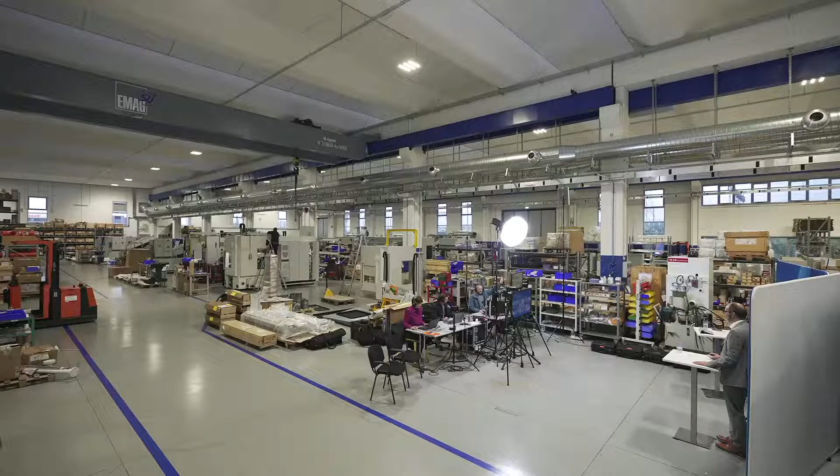This is the new plant of EMAG SU, the company formed by the former Samputensili and CLC companies that EMAG acquired in 2021. So we are now presenting you the companies and the new factory and plant.

The acquisition started last year, and one of the main ideas of the acquisition is for EMAG to be capable of proposing on the market a complete set of processes used in the gear business, in order to produce from a blank to a completely finished part, the complete gear teeth involute.

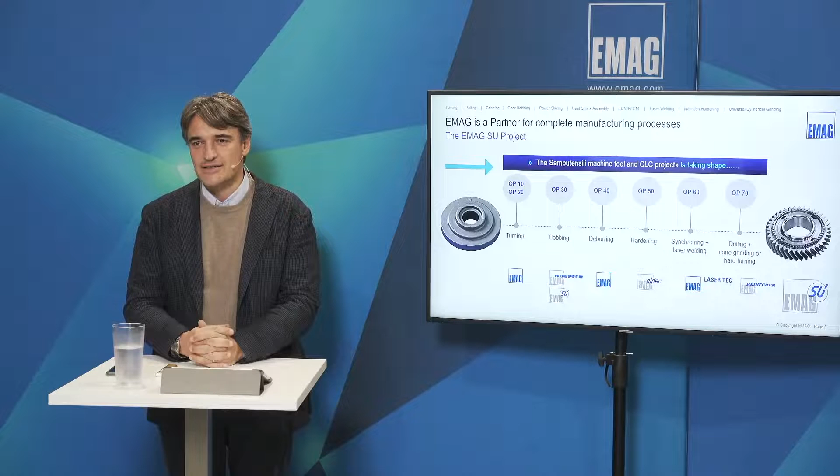So we see in this chart how the products of EMAG SU are entering. EMAG was already very competitive in the proposal of standard turning, hobbing with some EMAG Koepfer, deburring, hardening, and laser welding. Now with the products of EMAG SU, EMAG is capable of reaching one of its main targets and missions: to present a complete line for gear products, with the addition of some cutting machines, hobbing and shaping, and also with the addition of the Samputensili grinders at the end of the gear process.

So again, we are happy to welcome you here in the new plant. This is a new technology center. Here we are basically collecting the previous two companies, Samputensili and CLC, and we have been operating here since the beginning of May of this year.

We have already started delivering machines from the new plant, and we have inside all the activities related to the EMAG Technical Center for the gear business related to EMAG SU products. So we have design, engineering, assembly, pre-acceptance and final acceptance testing of the machines and testing of our products. We are happy to present our plant.

We want to go a bit more into detail on some proposals we have for electrical transmission, for the eDrive, for which we have developed some dedicated solutions that we want to present, together with a tour that we will make at the end of the video, to show you live some of our applications.

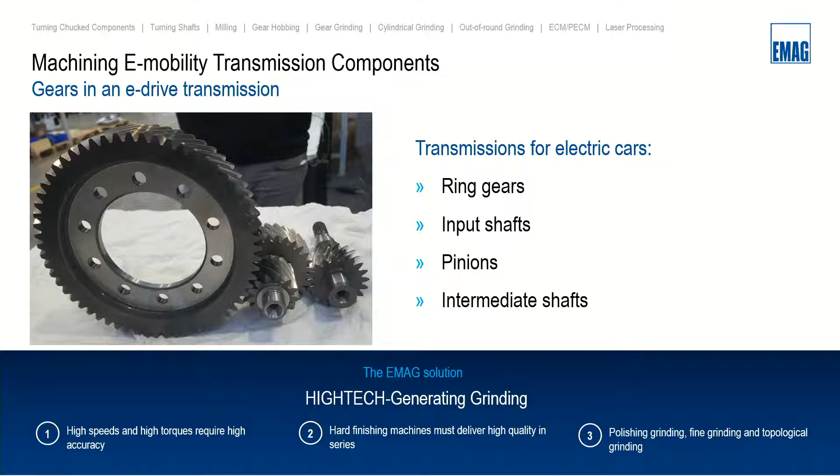Now we will look at which kind of grinding machines we can use to produce these gears. You can see here our two machines, the G160 and the G250. G stands for grinding, and the number behind indicates the maximum diameter we can process on these machines. Here on the G160, the operator stands here.

Behind the swivel control panel there is the door for automation, for loading and unloading, and we have a swivelable control panel that the operator can use on both sides. This is a highly productive machine, very fast, with a chip-to-chip time of less than 2 seconds. The module range is between 1 and 3, and the maximum shaft length is 300 millimeters.

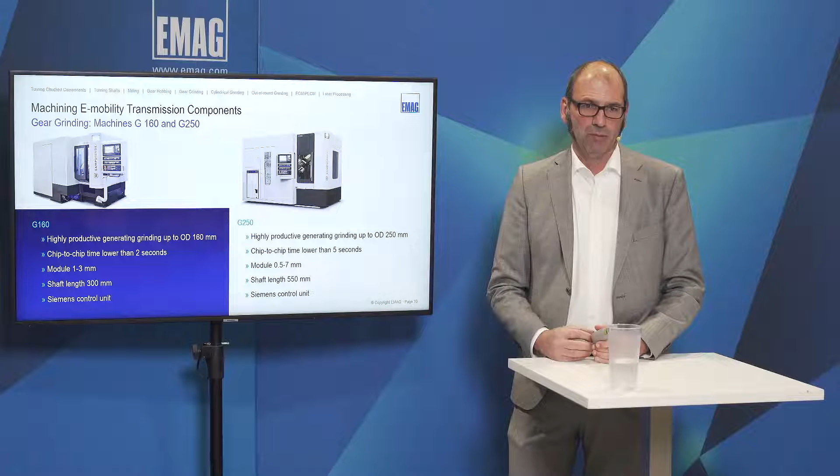On the G250, the operator is staying here. We have also here a swivel control panel, and here is the door for loading and unloading. This machine has a tower with 2 spindles, turning around for loading and unloading, with a chip-to-chip time of less than 5 seconds. The module range is between 0.5 and 7, and the maximum shaft length is 550 millimeters.

All the grinding machines have a Siemens control. Only the hobbing machines can be ordered with Fanuc or Siemens control, but here on the grinding machine, we use only Siemens. That's because of a lot of interpolation we must do during the grinding process, so we need the capacity of the Siemens controller.

Here I want to show you the architecture of the G160 machine. On the grinding head, you see that we have only 3 axes on this machine: Y and Z and the swiveling axis for the head. And you see one axis is missing, the tangential axis is missing.

How we do the shift operation in the generating grinding: here we have an interpolation between Z and Y, so that we interpolate these 2 axes to get a shift axis. This kind of architecture makes these machines absolutely stiff, mechanically stiff, and also dynamically stiff. One of the big advantages is that we didn't have this tangential axis, and there is no wear in this axis, because normally the space for this axis is very small, around 100 millimeters, and the pressure on this axis is very high. So we didn't have this in the machine, and this is really a stiff machine.

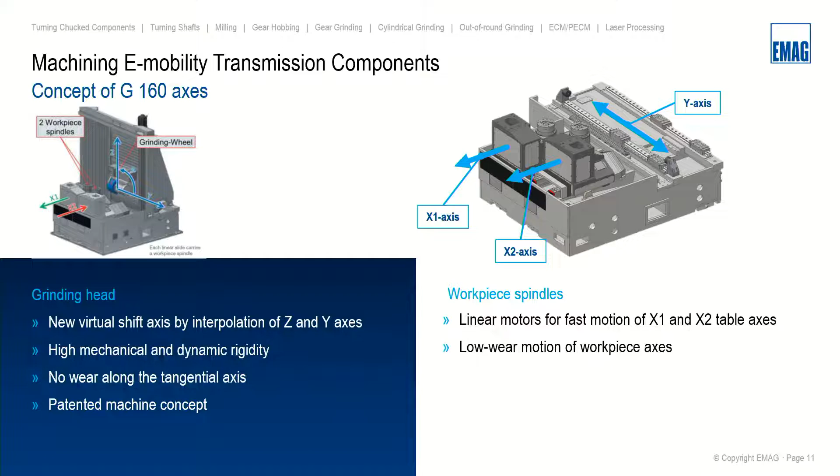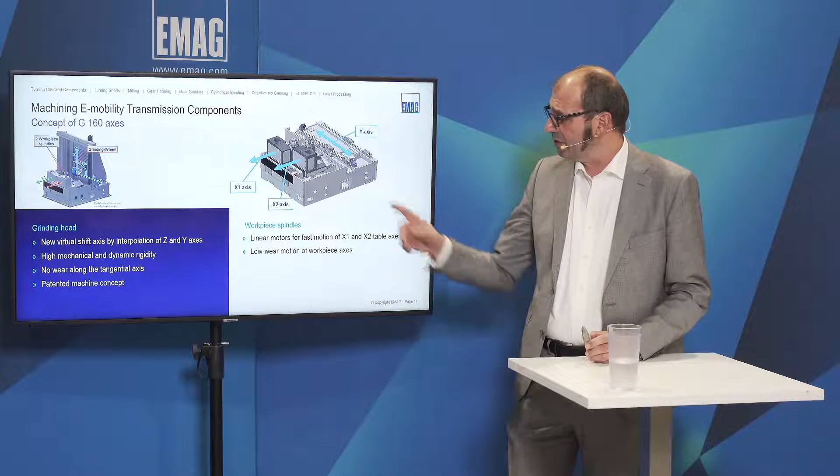On the table side, on the other side, you see we didn't have an X-axis to move the grinding head to the parts. We do this in another way: we drive with the spindle to the grinding wheel. So we have here on these 2 iron cast blocks, 2 direct-driven spindles. Below these spindles, there are linear motors so that we can do the movement next to the grinding wheel in a really short time, and also without any wear in this component.

So what is the advantage of this machine that you can see here? This is a view of a conventional grinding head. Here you can see the distance between the swivel point and the tip of the grinding wheel in the conventional head is 480 millimeters. On the G160, it's over 100 millimeters less. Here the distance between the A-axis and the point of contact is 370 millimeters.

What is the biggest influence we have on the grinding side? You can see here on the left side a picture we have made from the surface of a gear. When we have this tangential axis located in this area, you can see some effects from a frequency. We call this ghost frequency, and these ghost frequencies are not so high, only between 1, 2, 3 microns, not more. But they have an influence on the noise behavior of the gear. These small waviness create noise in the gear.

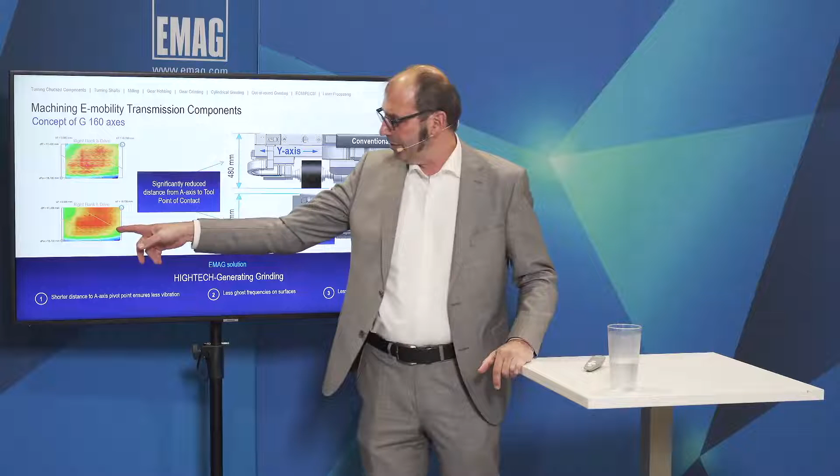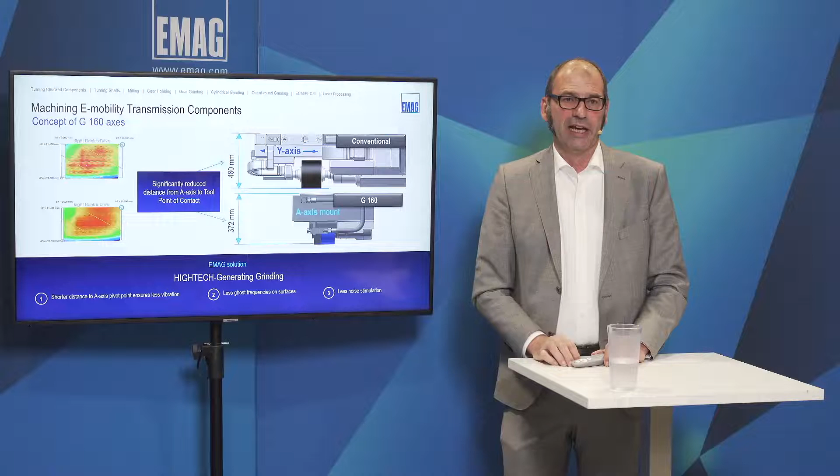When you compare this picture to the one from the G160, the frequencies are nearly gone. So this influence is much better, especially for electrical components running with really high RPMs, where noise behavior is really important. This noise behavior is important regarding 2 points. The main reason is we don't have a combustion engine, so there is no noise around, and with higher RPM, the noise frequency is much more in the area which we can hear. So it's absolutely necessary to reduce noise in these kinds of gears.

Here is now a short video of the machine. I'll make it a little bit bigger. So here's the part, here's the grinding wheel. You see we are grinding now this small pinion, in this case here on the spindle, making 2 passes, a roughing and a finishing pass. And you have seen before how short the time is between one spindle and the next spindle - this is 1.6 seconds, so we are really fast.

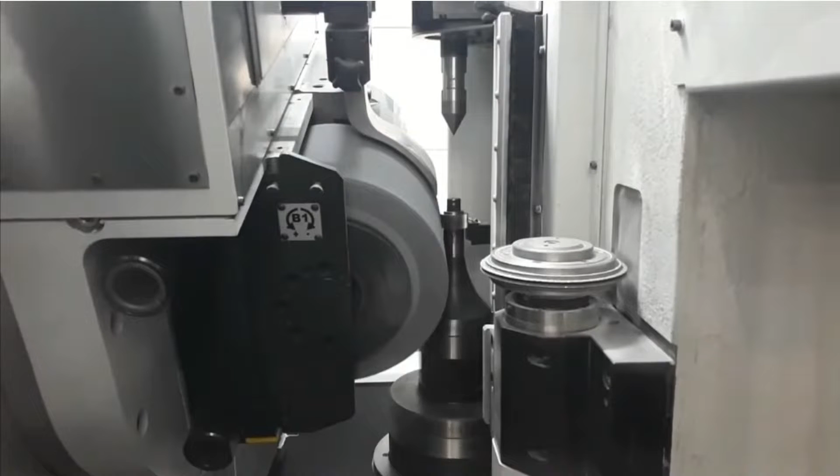What is the advantage for the customer? Normally we have a chip-to-chip time on a machine which is between 4 and 5 seconds, so we are 3.5 seconds faster on this machine, only with the jump from one spindle to the next. When you grind such a small gear as here, we do this under 10 seconds, and you can reduce the time over 3.5 seconds only with the chip-to-chip time. Then we are between 15 and 20% faster than on the conventional machine, and this makes this machine so interesting. I think this is the fastest generating grinding machine you will find on the market.

Here below the gear, of course, is the balancing system integrated, and also we have an NC controlled oil nozzle so that we are really in a good position for cooling this process during grinding.

So now I will jump to the technology. I want to tell you something regarding meshing, dressing, topological grinding, fine and polishing grinding, and noise reduction with an optimized surface structure.

Here you can see on the left side the meshing of the G160. The inductive sensor is directly placed behind the gear, and this can be set in diameter and in height, so that we can set this directly to the gear. And of course this meshing is meantime parallel, so we need only some RPMs that we can mesh the gear and bring this together with the grinding wheel.

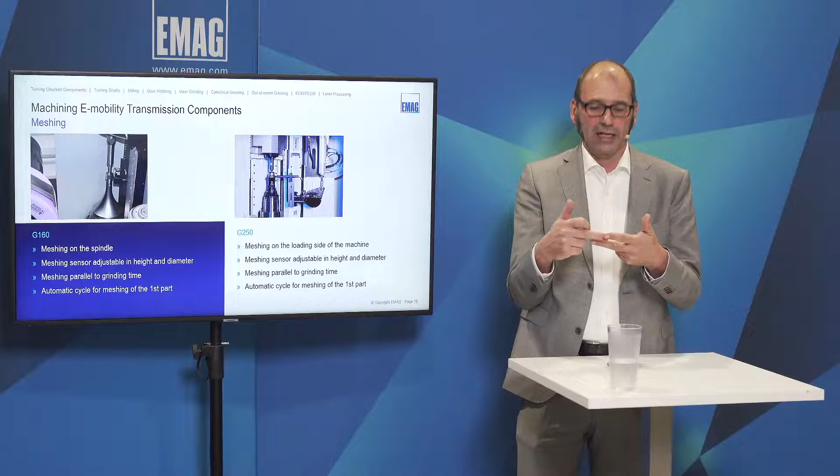When the first part will come in, there we have an automatic cycle. For example, when the tip of the grinding wheel hits the tip of the gear, then we can recognize this over an acoustic sensor, and then we move the part half of the gap below, go in the slot with the grinding wheel, touch it on the right flank, on the left flank, go a little bit deeper, do the same thing, and then we have an automatic meshing for the first part.

The second one will be done with the inductive sensor. On the G250 we have a 2-table concept, so it's a tower with 2 tables, and in the loading and unloading station we have a swivelable meshing sensor which is swiveling in, then does the meshing, swivels out, and then the tower turns again to load and unload the part and bring the grinding wheel in production. Also here we have the automatic cycle I've explained before.

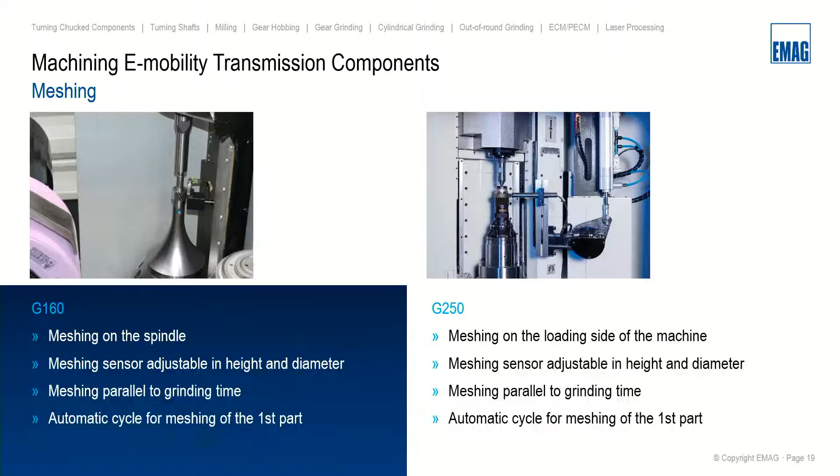Then we come to the dressing. Normally the eDrive components are running in mid-size or bigger batches, so we use only 2 kinds of dressing rolls. We have a multi-rib, which is a dresser that dresses all the starts on the grinding wheel in time, so it's the shortest. We get the shortest dressing time, and this is more for mass production when everything is clear, the profile, form, and the modification on this flank form.

And then we have also here the full form roll. The full form roll is also dressing the right and the left flank and the tip, and here we drive through every start. From the cost, of course, the multi-rib is a really cost-intensive tool. The cost of the full form roll is lower.

And also we use this full form roll for doing dressing for the topological grinding. This is the picture on the right side. Here you can see our grinding worm, and you see we have split it into 3 sectors. We need this sector because during the dressing for topological grinding, we are driving with the dresser diagonal through the grinding wheel, and so we have here some areas which we are using for roughing, finishing and finishing.

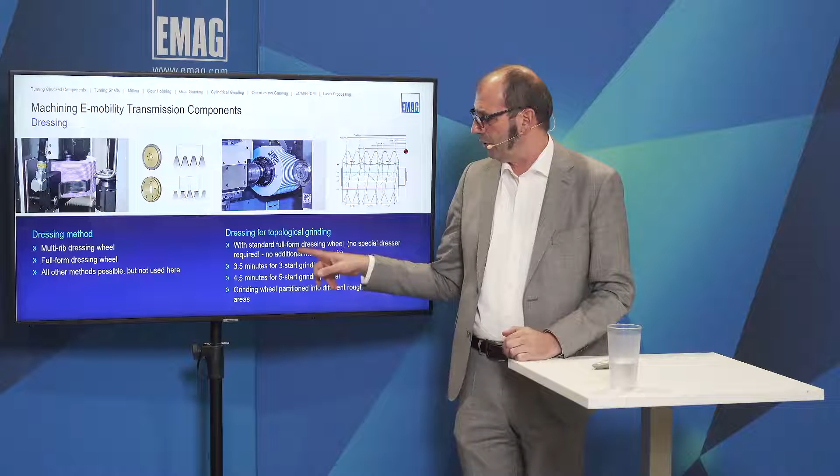But we have a big advantage here in our machine. I've mentioned before, we use a standard tool, so you can grind a normal gear with this dresser and also topological ones. It's not necessary to change the dresser, and also the dressing time is on the same level. So for a topological grind part, we need 3.5 minutes for a 3-start wheel and 4.5 minutes for a 5-start wheel, which is similar to the standard process.

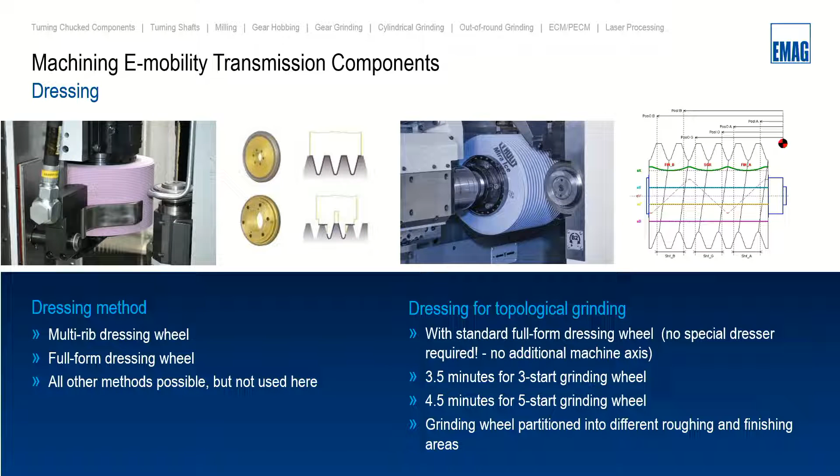Okay, let's jump to topological grinding itself. First, I want to give you some cases regarding the twist in the surface.

We have a shaft with a helical gear, and we are making a crowning over this gear. When we do this, we drive back with the X-axis to bring this crowning into the gear, and we get a twist in the surface. You can see this when two gears are running together, a gear and shaft for example, both have a negative twist. The edges connecting here together have a high pressure in this case, and this increases the wear in the gear, and also the noise behavior.

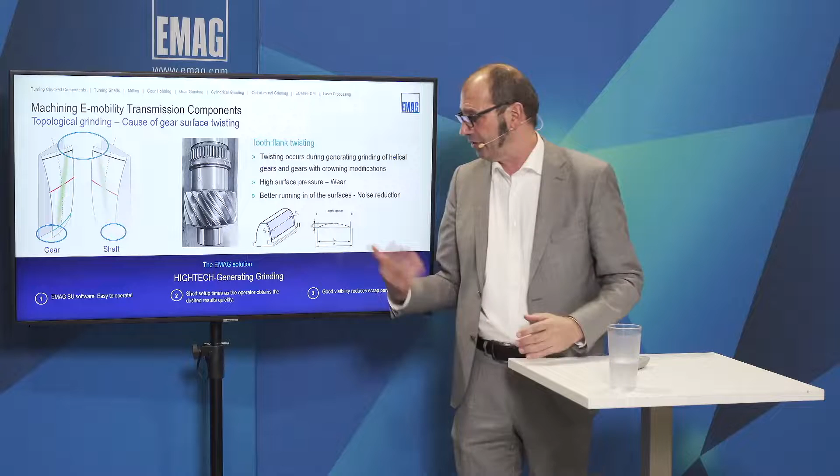With the twist compensation, we are now able to make the opposite twist. We turn this twist to the opposite side, and when the gears mesh together, it's much smoother than this situation, and this reduces noise. Of course, we can also do twist free, so the flanks go parallel together. This is one possibility, or we can do it so one side has the opposite twist and the other is twist free. Here we are absolutely open.

So what must we do in the grinding wheel? You have seen the picture before—this was our wheel I've shown you at the dressing page. And now here, this is the grinding wheel itself. You see, when we want to make it twist free, we must bring this edge here to this position.

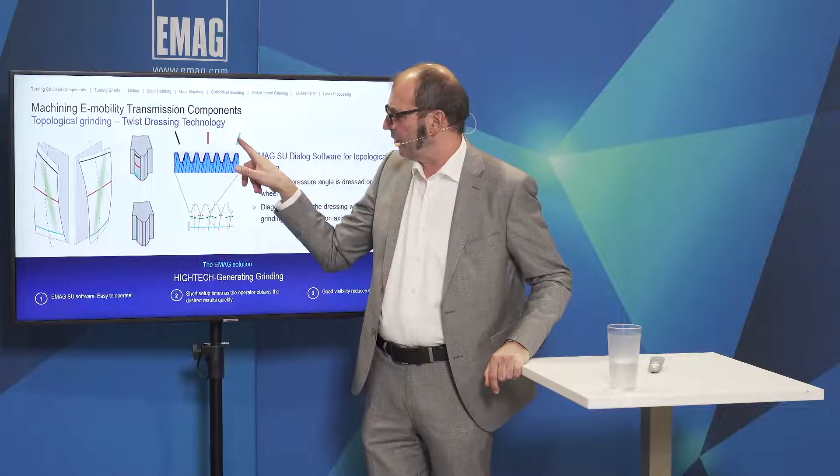So we must change the pressure angle. In this area, when we grind in this sector, we must have another pressure angle than when we are doing this compensation with this pressure angle here. So we must shift completely to this sector to set the different pressure angle we want. With the dressing diagonals through this grinding wheel, we get this effect of a very constant variation in the pressure angle, and so we can compensate these twists.

We correct normally twist only in the profile form. Automatically, it will have an effect on the lead. So this is directly connected, and it's only necessary to make modification here in the profile form.

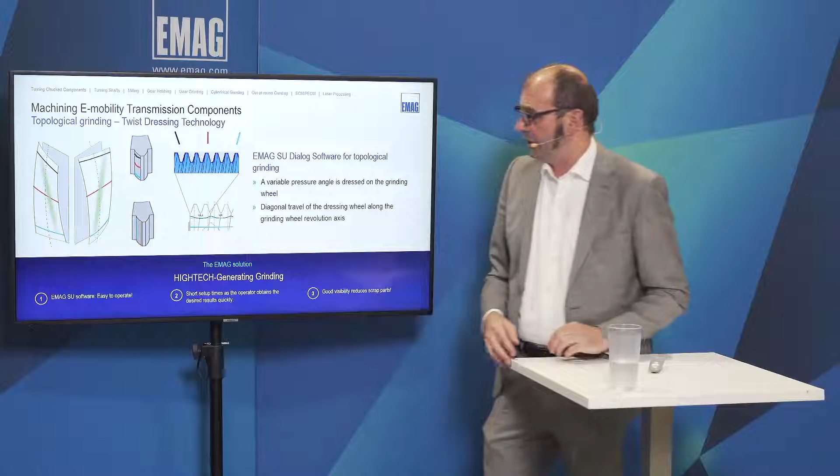He can show the natural twist, which is normally coming out of the effect I've mentioned before. Then he has the possibility to choose natural, twist free, the opposite twist, and different twist on the right and left flank. He can see the result here on the screen.

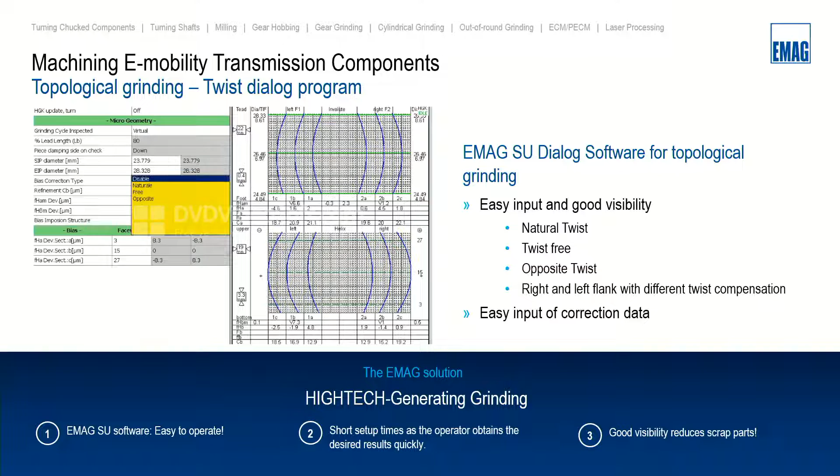What we are doing when an operator wants to grind a gear: he puts it on the machine, and then he says, okay, I want to make this, for example, twist free, and chooses this in our HMI. Then the machine calculates, and he can check this on the visualization. This is the result which comes out regarding our internal calculation only from the machine axis.

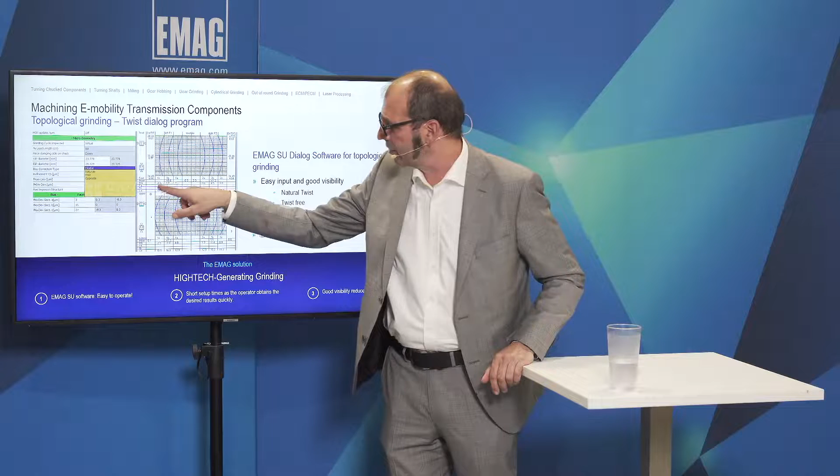Then he can say, oh, here this is minus 4.6 microns, this is a little bit too much, I want to correct this maybe in this direction. Then he can put the correction in, and check directly here on the visualization what he has done, if he has made the correct correction.

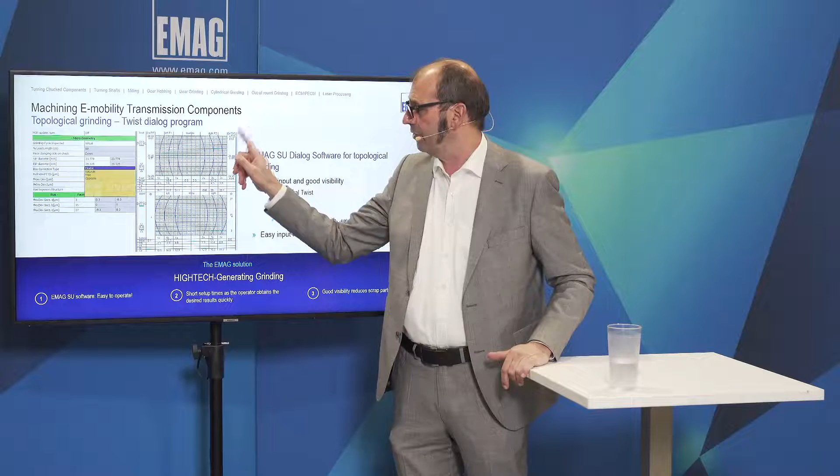When this is fine, he wants to start with the first gear, so he grinds the first gear, brings it to the measuring room and comes back, and then says, okay, I want to correct only 2 or 3 microns in this area, in this direction and that in this direction. He can put the data in, make an additional calculation, and look at the visualization to check if he has corrected in the right direction, then start the second gear. And I think then it's fine.

So what is the advantage for the operator? The setup time is very easy, because before grinding a gear, he can check what he has done, if he made the right corrections. So the setup time is much lower than when he first grinds in the wrong direction and then has to correct it again. So it's very easy and useful for an operator to make corrections and reduce setup times.

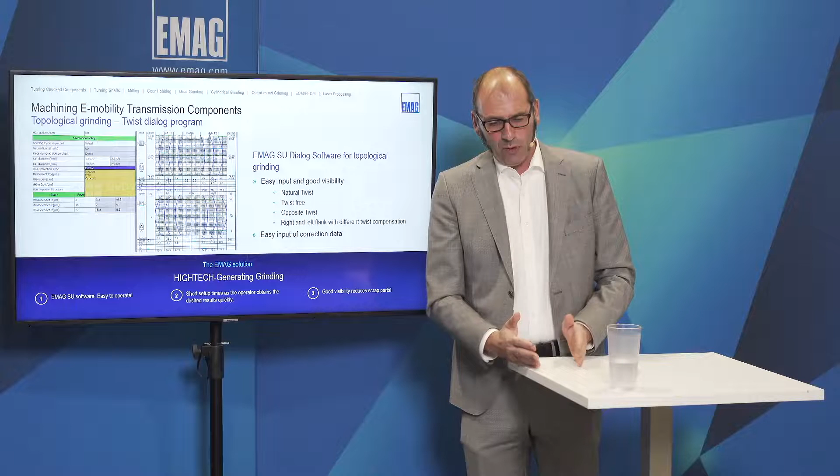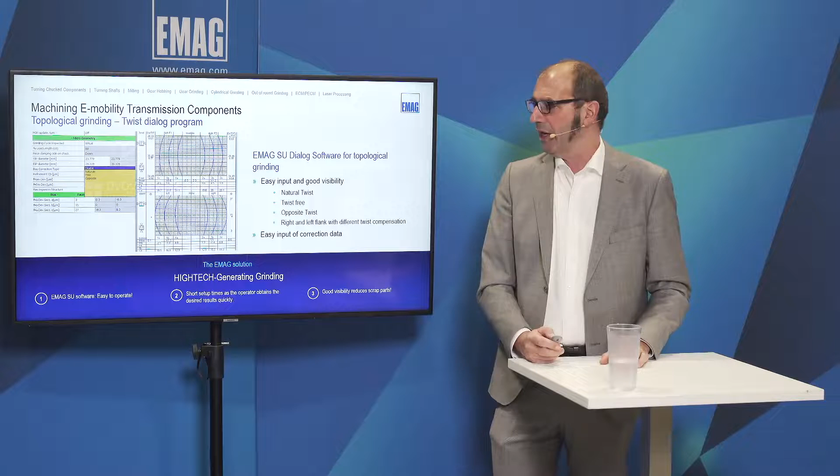So that you have at the end more productive time on this machine. I think this is a big advantage regarding this easy software we have on the machine with this kind of visualization. What is coming out, you can see here on this graph.

On the left graph you can see a chart with a natural twist, and on the right chart we have done different corrections. On the left flank we have the opposite twist, and on the right flank we have twist free. This is easy to set up, as I've mentioned before.

We have done this with the full form roll, which has a 2-flank contact, and we dress also the tip. So it's not only diagonal driving through the worm, every axis during the dressing operation is moving to create such a result. So there is a lot of mathematics behind getting this fine result.

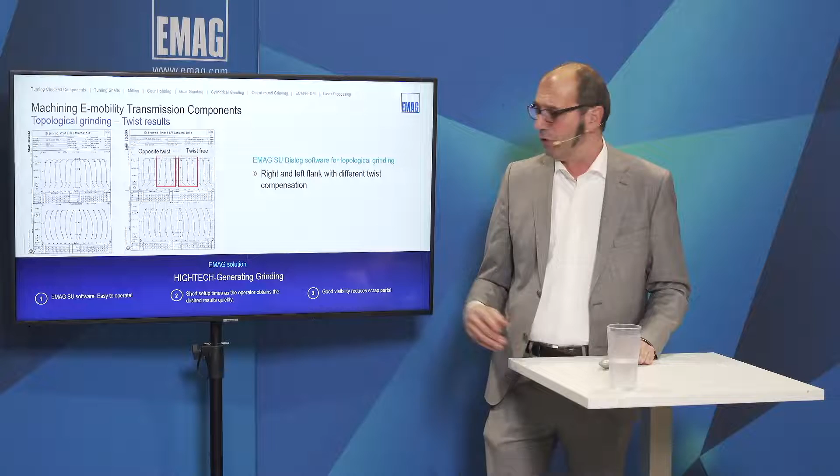Also, when you look at the quality, I think this looks very good. Here on the twist free, you can see really parallel lines, and the opposite twist looks really like the opposite twist as it is on the other side. So I think this is a perfect result.

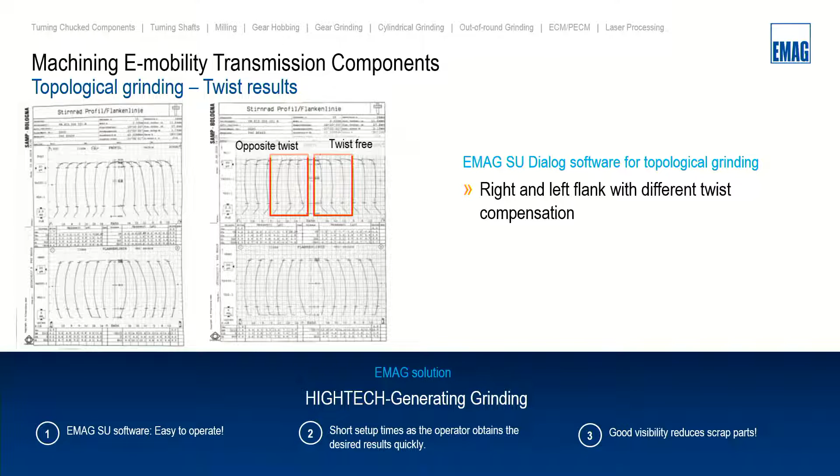Now we are coming to the modification in the surface roughness. And here we have two possibilities to do this. First, we can do this with fine grinding, and then with polishing grinding.

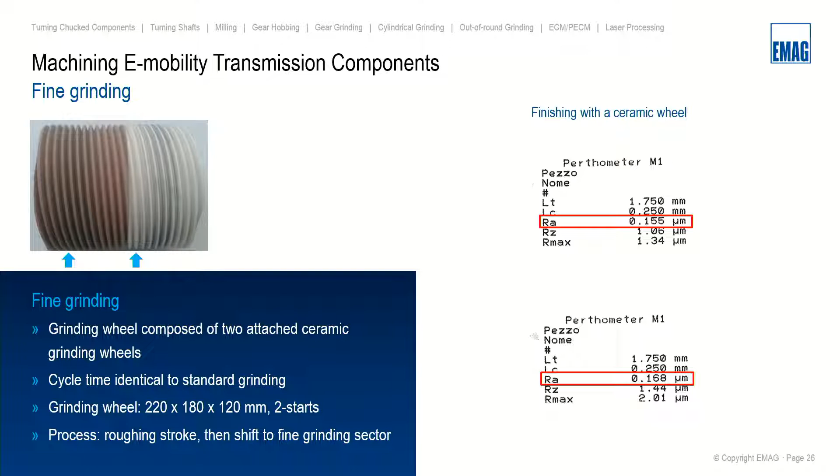What is coming out here? We can see that the Ra value is 0.16 on the right flank, and on the left flank it's 0.17 microns. So it's a really good result, and in mass production we are with this process every time below 0.2 microns, so it's really a good surface.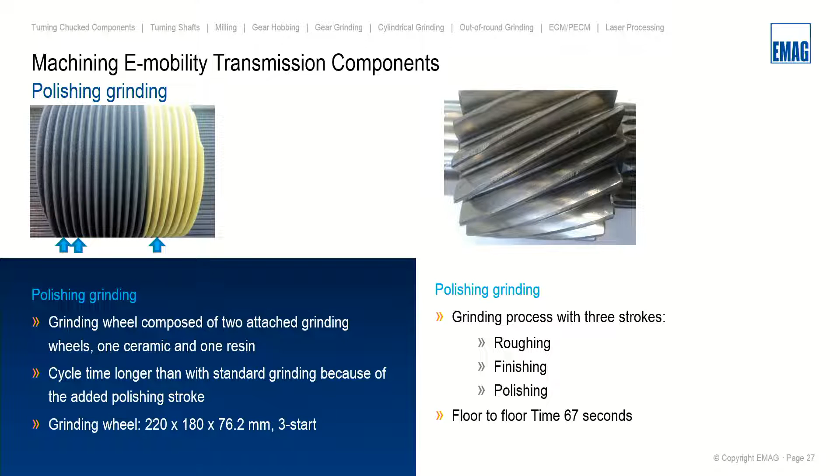Now we are jumping to the polishing grinding. You see also here a grinding wheel. The blue one is also a ceramic part, and this is glued together with the resin wheel on the other side. The process here is that we are doing first a roughing pass, then shifting a little bit, doing the finishing pass, and then jumping to the polishing area and doing the polishing operation.

And when you look here at the gear and the surface, there is another word in the English language, it's mirror grinding, and it's really like this. When you look at the surface, you can see the opposite side of the gear, so it's really a fantastic surface. And for this gear we have ground, we have had a floor time of 67 seconds.

What is the big difference between fine grinding and polishing grinding? Of course, it's the surface, it's much better here. But with fine grinding you have only two passes, and here you need one pass more for the polishing stroke. But first, we want to look at what is coming out here.

So also here we have Ra, which is 0.12 on the right flank, and 0.11 on the left flank. So really a good result. And also in mass production, we are definitely under 0.15 microns here in this case.

But I also want to say something regarding the quality we get out here. This is a typical part for an eDrive. And you see here the result is really good, especially when you look at the runout. The runout is really perfect, and this makes these gears also not so noisy. Because when the runout is really bad, then you hear this in a gear, it's like a sound, like a frequency you can hear.

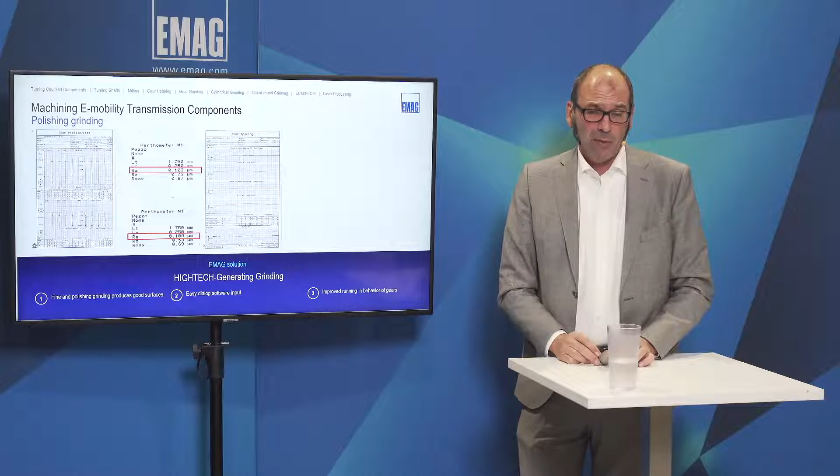And also when you look at the FFalpha and FFbeta values, these are also very low. We are normally under 1.5 micron with FFalpha and FFbeta value. So this is really a perfect gear, I would say.

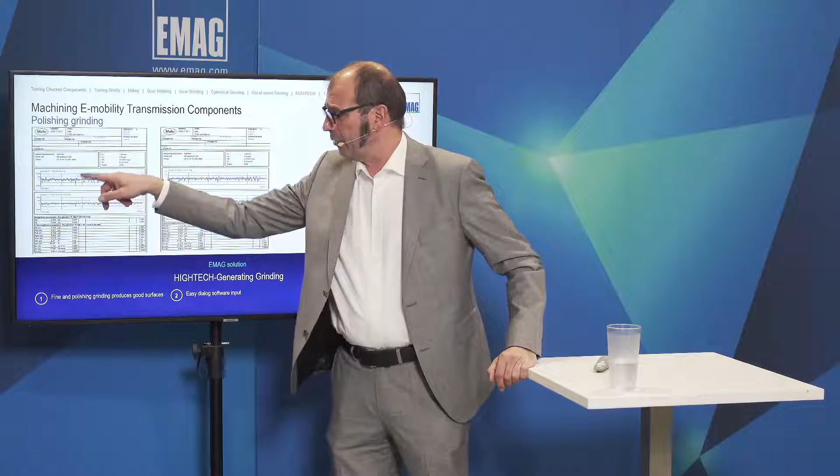With the polishing stroke, we do something: we cut the peaks in the surface away, and you can see this here on the surface measurement we have done. So when you look here, all the peaks are gone, and only holes remain where the oil can sit and have a good running with the two gears together. The polishing stroke eliminates all the peaks.

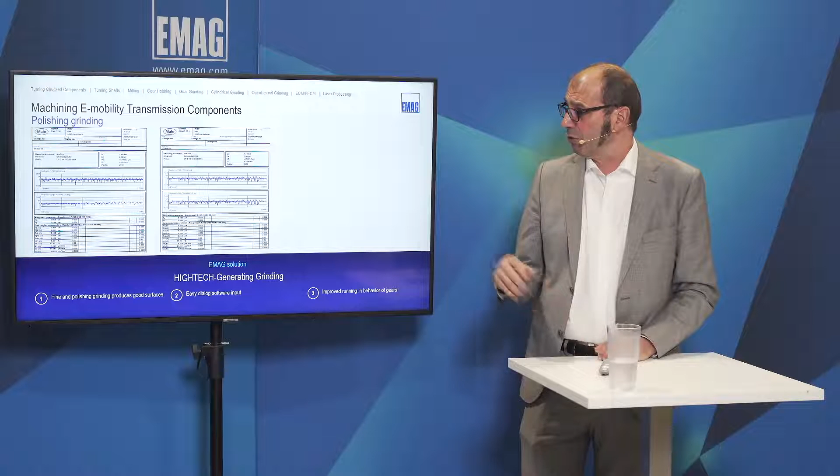So when we start running off the gears together in the first runoff, this has an influence on wear, because the peaks create wear, so pitting starts, and we reduce this here. The big advantage is that we can send more torque over this kind of gears, and the noise behavior is normally better. I must say normally better - we have some cases where the noise behavior with polishing grinding is not better than it was before. So it's not 100% capable for noise reduction.

Then we have the possibility for grinding gears with noise-optimized grinding. On the left side, you can see a picture of a surface of a gear. What you see here is that the marks, the texture of the surface, go completely over the flank line, and they are also parallel to the axis. This means when you have the same marks on two gears running together and they are parallel, they create noise regarding the parallelity of these marks you have.

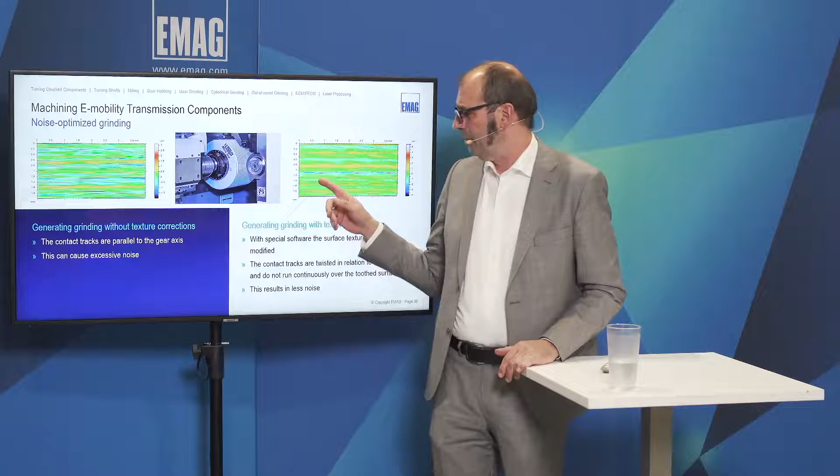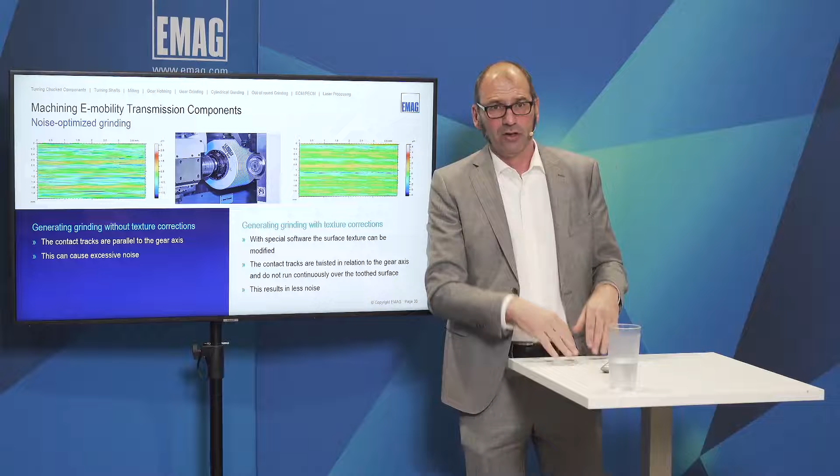With this software, we can change the angle a little bit and shorten these marks. When you have an angle between the two gears as they mesh together, the noise behavior is much better. Also, when these marks are not going over the complete lead line, the noise behavior is much better.

So now I want to show you some examples. I have two examples here in the presentation: one on the G250 and one on the G160. You can see here the ring gear which we have clamped with a pressure bell from the top, so that we have a stiff clamping fixture here.

This is a clamping fixture with expansion and then pressing from the top, so that we have a stiff clamping here.

Here we have 88 teeth with a module of 2.1, a pressure angle of 20 degrees, and a helix angle of 25. The tooth width is 34 millimeters and the outside diameter is 206 millimeters. We achieve here a DIN quality of 4, and the floor-to-floor time was 69 seconds.

This includes 69 seconds, including twist compensation and the proportional dressing time. So the normal grinding time is 59 seconds in total.

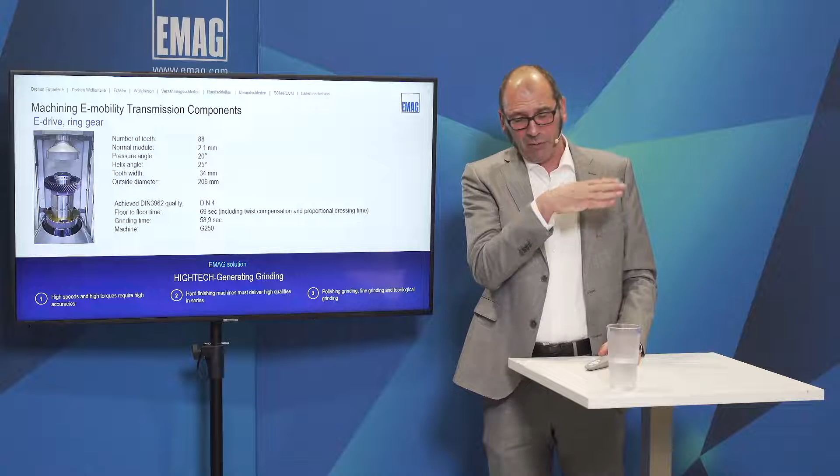I've mentioned before that with twist compensation, the number of parts is lower than in normal grinding. This has something to do with the sector, since every time we drive through the same sector of the grinding wheel. After a while of grinding, the ff-alpha and ff-beta values increase, and that's the reason why we don't have as many parts between two dressings.

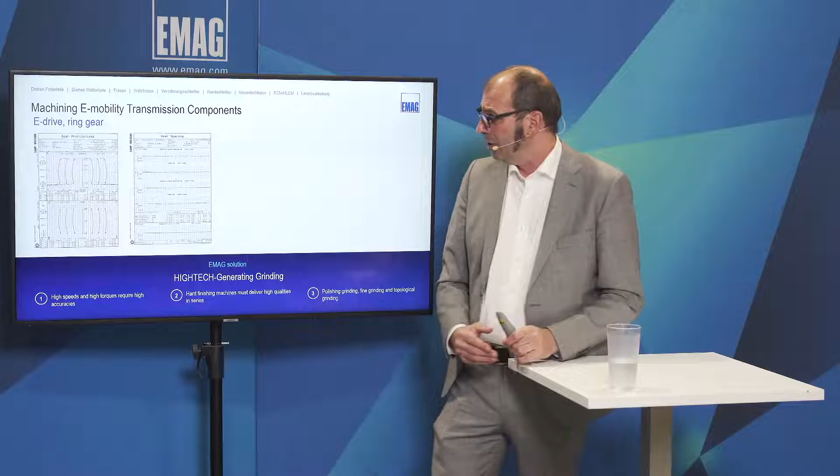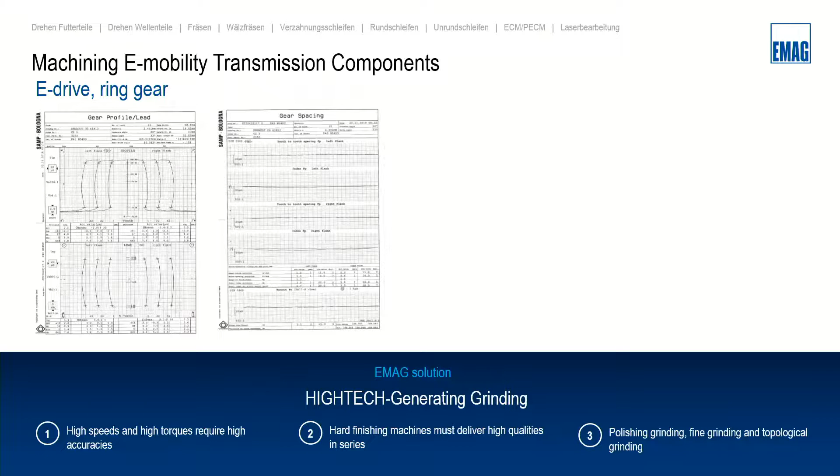In the profile form it's 1.1 microns, and in the lead it's also 1.1 microns. So it's a really good result from the generating grinding.

Here is an example for a G160: number of teeth 21, module 2.1, pressure angle 20 degrees, helix angle 25 degrees, tooth width 37 millimeters, and the outside diameter is 55 millimeters.

Also here we get quality with a floor-to-floor time of 34 seconds, including twist compensation and proportional dressing time. And the grinding time was 25 seconds.

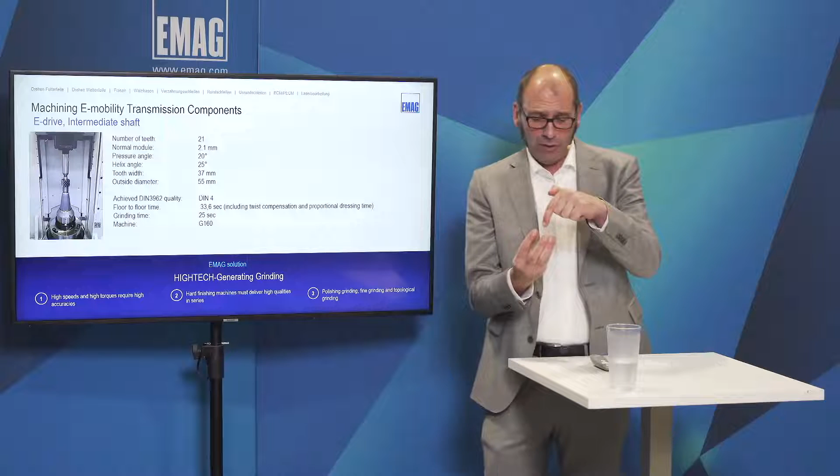What we have done here with the clamping: this is a small gear, so we have a friction cup below the part, and we are clamping with the center from the top. With the friction cup, we are also able to clamp small diameters really stiffly, so that we have a really big effect regarding runout.

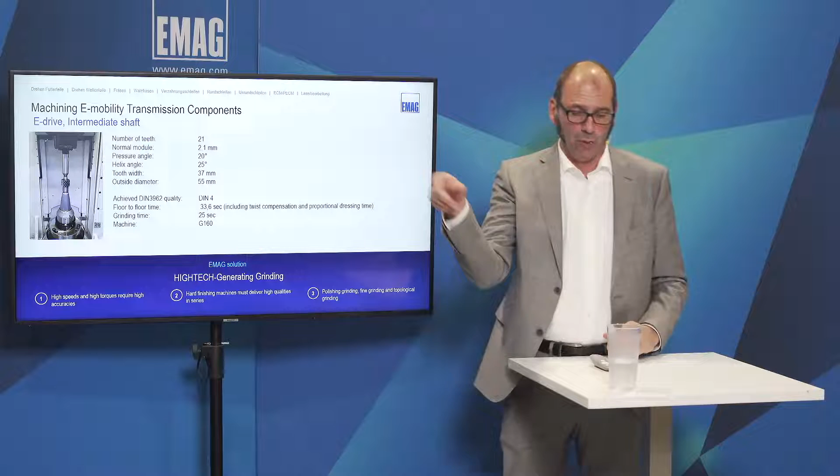There is a movable center from the bottom which presses the part out afterwards, so that we can load and unload this with the automation.

Also here a result. This is a gear which is much more compensated, so you can see much more modification. In the profile form, we have a conicity combined with the crowning, stronger on the left side than on the right side, and in the lead it's absolutely the opposite—the modification on the right side is much more than on the left side.

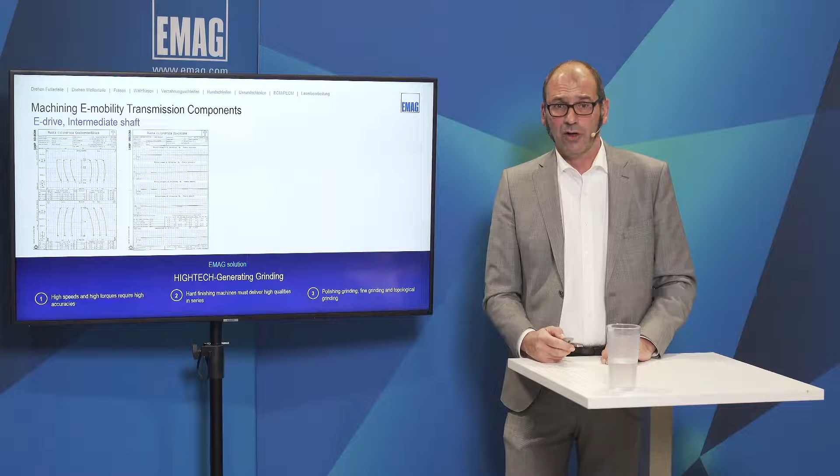But here, also with the friction cup, you see the runout is really perfect, and also here the ff-alpha value and the ff-beta value are really on a good level, so absolutely nice quality, I would say.

So now I want to give you only a short outlook on what we have done in between with dry grinding. We have here a process which is capable of grinding without oil. How does it work?

First we must make, instead of rough grinding, a skive hobbing process. When you want to remove much material with the grinding wheel, it doesn't work, because then you have burnings in the gear. But with the skive hob process, this is more cutting. We remove the heat out of the part so that we can use this as a roughing process.

And the dry process with the generating grinding wheel works when we have less stock on the flank and when we have a really high speed, so that the ellipse form which is going over the surface during generating grinding doesn't have enough time to bring heat into the part, and then it works fantastically.

Afterwards I'll show you a video of how it works, but I want to give you also some ideas why we want to implement this dry grinding process in the market. And there are some reasons.

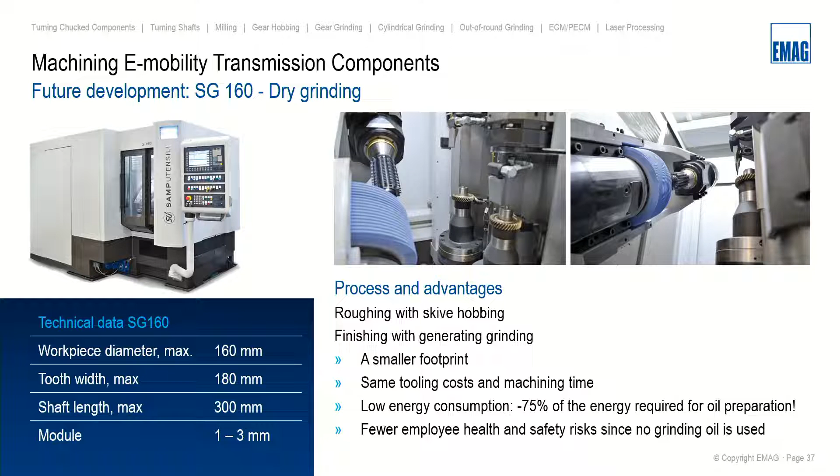Also from the process time, we are on the same level as with wet machines. Sometimes we are a second faster, sometimes a second over the wet grinding process, but in total it's the same process time. And we can save a lot of energy. In a wet grinding machine, 75% of the energy is consumed in the filtration unit for high pressure and cooling the oil, and of course there's the health and safety of employees in your company. Dry processes are really an advantage regarding the wet operation.

So here's the video. What you can see now, we are doing the skiving process. The gear comes in after the heat treatment process with a hardness of 58 to 62 HRC. Now, when we have a stock of 100 microns, we have removed 90 microns with the skive hobbing process. And now we've skipped to the generating grinding process, removing the last 10 microns to make a nice surface.

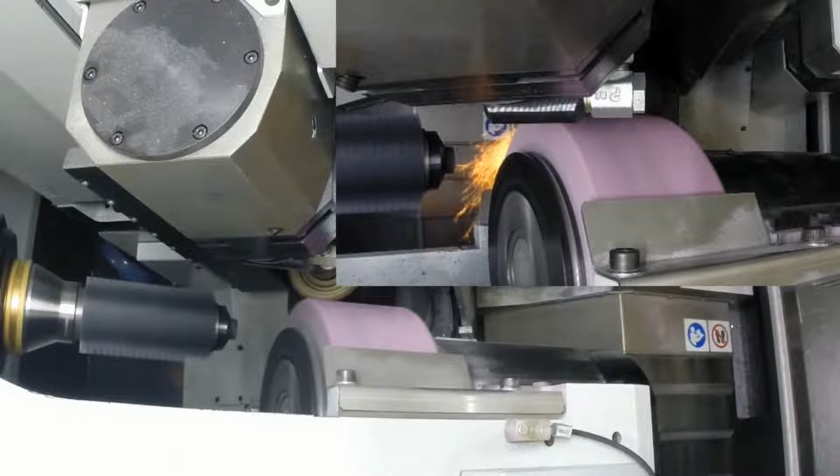Also here you can see the short chip-to-chip time of 2 seconds. In between we load and unload the part and do the meshing, and now it's waiting and ready for the next one. After the skive hobbing process is ready, we jump back to the grinding process, and here you can see this in real contact - how does it look when we do this kind of grinding?

I must say also something regarding the quality coming out of this machine. This process is the first grinding process where we have a constant stock before grinding. After the skive hobbing process, the stock is always the same, and this is also the result of this machine - the parts look really similar regarding the quality we get out.

So now I think we can make a tour. I'm ready with this presentation.

Thanks a lot, Alex, for your detailed presentation of all our proposals for the eDrive. Now it's time to really see the new plant that we have, the new plant that is running. Of course, now it's late in the afternoon, so maybe we're not 100% fully loaded, but at least we can show you the plant.

Here we have the measuring room, where we basically certify the quality coming out from our machines. We have an involute measuring machine, a CMM 3D machine, as well as a roughness measuring machine capable of measuring all the delicate items requested by the eDrive components, like the roughness coming out from super finishing processes. So we are capable of properly qualifying the gears.

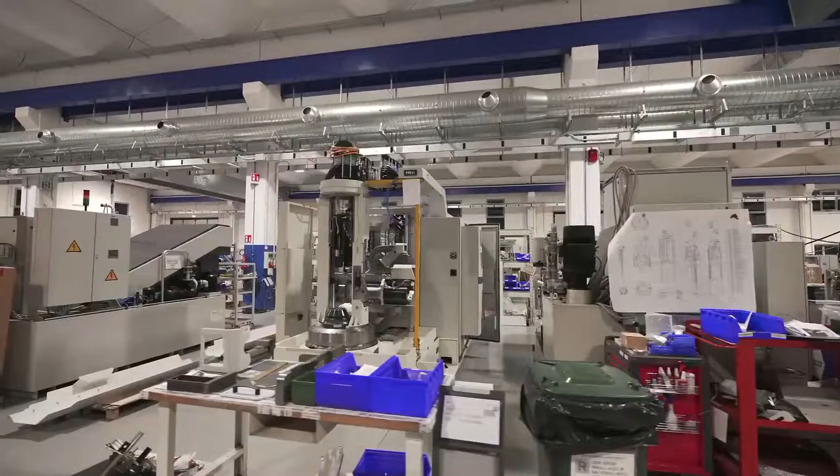This machine, together with the other machine we saw in a previous stage of assembly, is basically part of a project sold to an automotive customer, where EMAG has proposed a complete line after the heat treatment process - comprehensive of hard turning, laser welding, additional processes, and finally generating gear grinding. This is the mission, and the idea of EMAG being capable to provide a complete solution is now put in place.

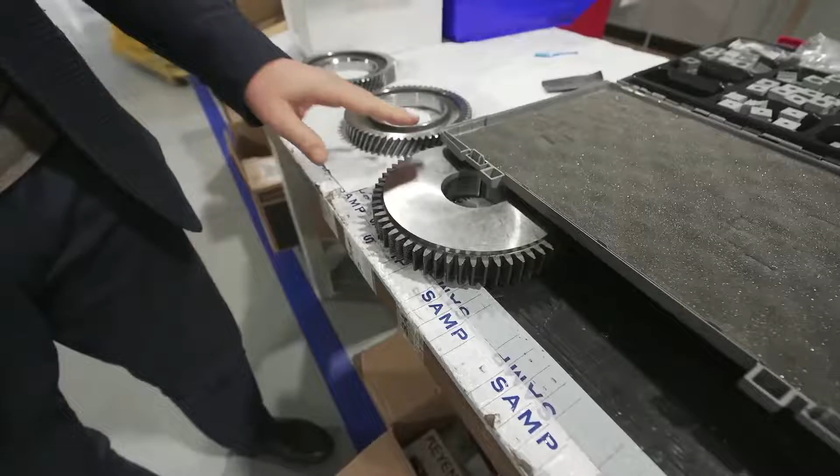We have other machines here also available and in assembly. For example, this machine is a kind of old process, but still actual process - this is a shaving machine. The shaving process basically uses a preformed tool, very near to the final profile of the part that has to be produced. It's a process that finishes the gear before heat treatment.

It's still one of the cheapest solutions to finish a gear, but in this era of the eDrive, it's a process that can also be used to improve the input quality of the gear grinding process, because the gear grinding process has been requested to reach much higher results and performances. The better the input quality, the better the final result.

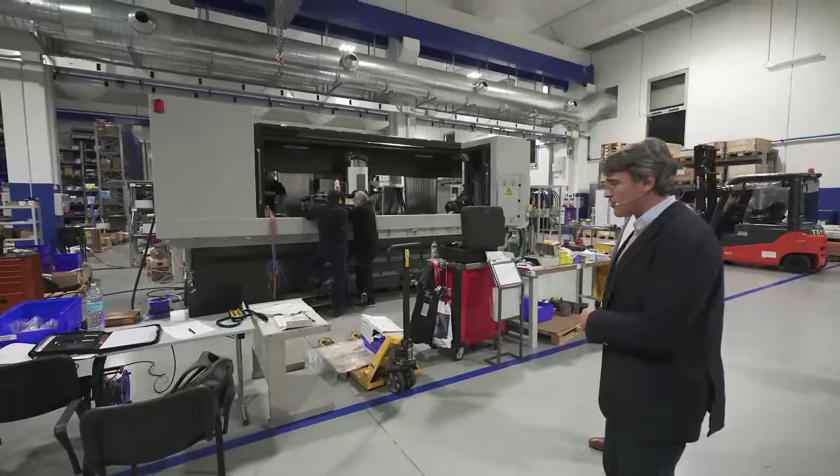Here we move into another area of our assembly, where we are assembling the profile grinding machines. We have different sizes of profile grinding machines. Here you see a model of a G375, one of our most produced machines, most present in the market, as well as on the opposite side the largest size of profile grinding machine - a 4-axis CNC machine capable of grinding rotors, screws, or big gears for different fields of application, rotors for compressors or screws for hydraulics, and so on.

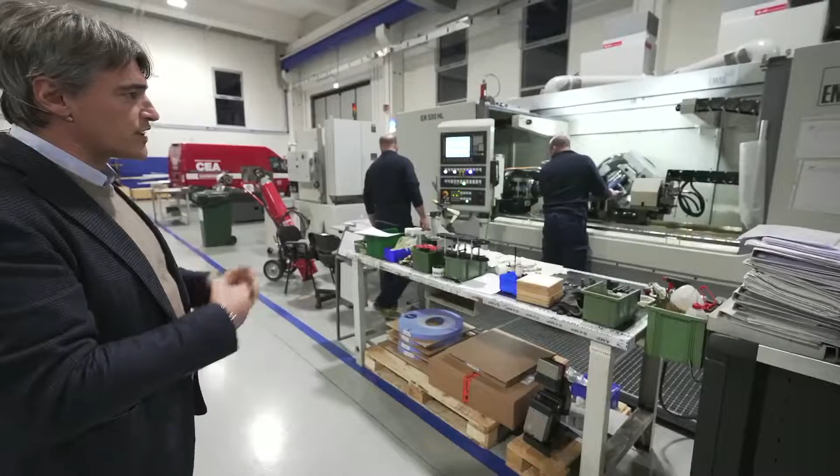Here you see one of our most flexible solutions, again a profile grinding machine. In this case it's used to grind a screw pump, so the profile of the screw. This machine provides all the full options of profile grinding capability from the definition of the profiles, with a very big wheel for low tool cost, and is capable of having a flexible configuration.

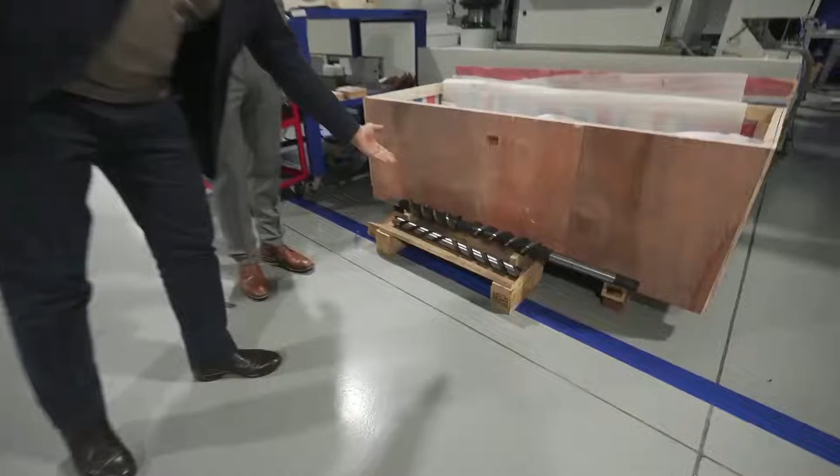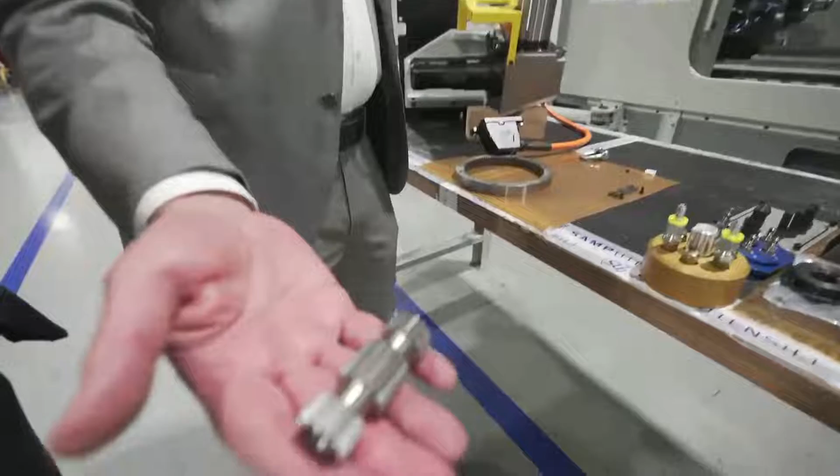In fact, here we can show the same machine that can grind a screw like this, a so-called double helical screw of different sizes, but a similar machine configured in another way, like this one, where we have an additional fifth axis CNC actuated, which then becomes a suitable machine for a large variety of applications and a large variety of gears, for example for the field of aerospace.

So aerospace is trying to create and propose a lot of different types of gears, compact form, very high precision requests, and normally with a lot of interference to have compact gears. So we need a very small grinding wheel, but also very big grinding wheel for different gears.

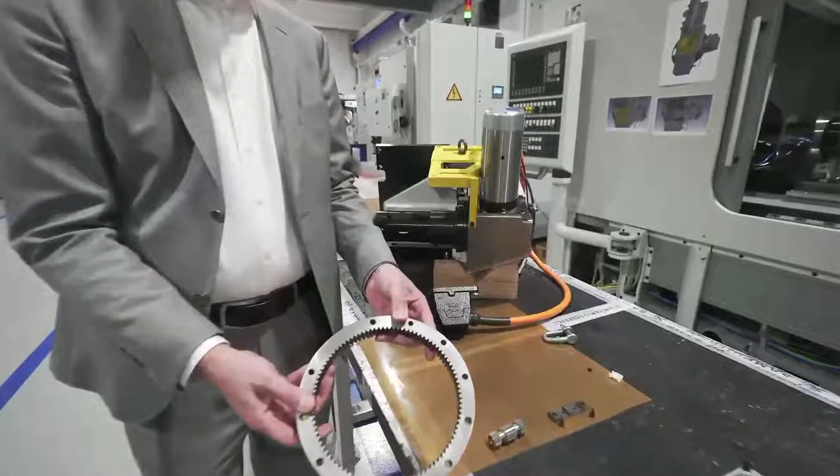And in a different configuration, as you see here on the machine, we have an external spindle. On the table here we have another option, which is an internal grinding arm, capable of grinding the internal gear. In this case it's straight, but we can also grind helical internal gears.

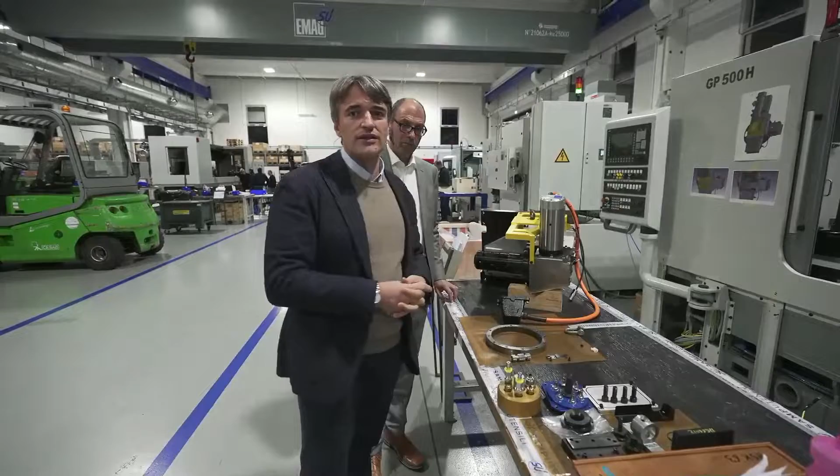And we have this kind of unit, which can be equipped with different sizes and varieties of internal grinding arm, from a wheel that can be as standard from 150 down to 30 millimeters, but in special cases can also be properly designed to go even lower than 20 millimeter diameter grinding wheel.

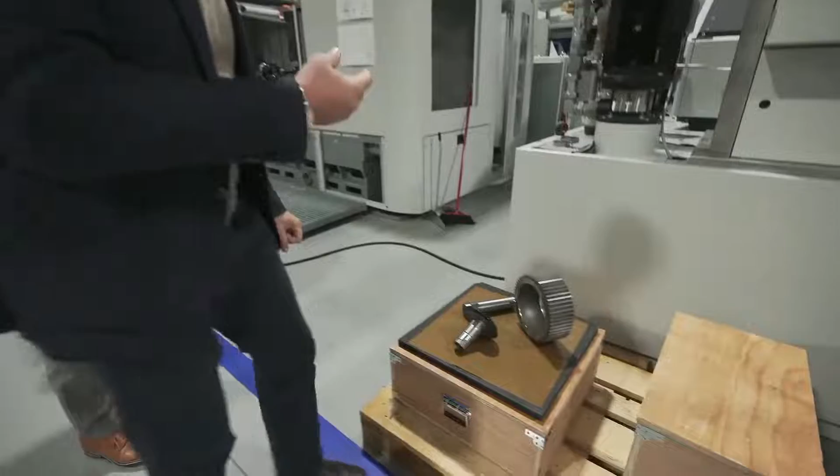So we see here some other examples of applications we can grind. In this case, we are not grinding the bevel gear, but we are grinding an internal spline that is done from solid in some applications. For example in aerospace, some of the features are ground from solid in order to be optimized in the process.

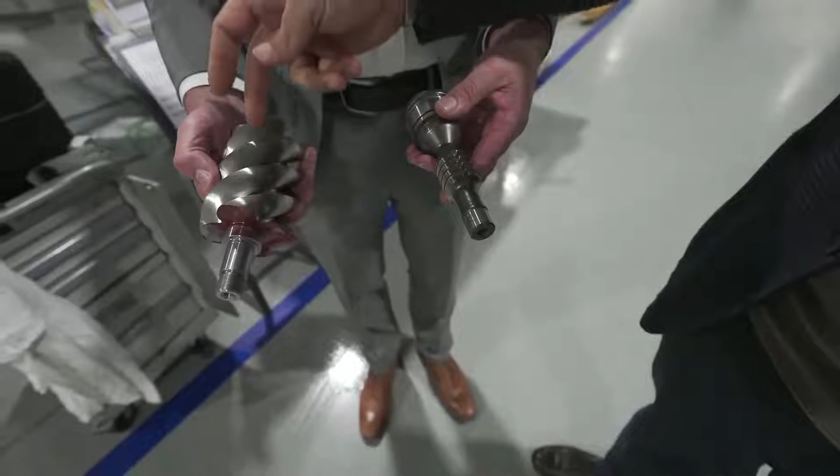Here we can show some other examples of products that can be ground on our horizontal profile grinding machines, like screws for gearboxes, for worm wheel gearboxes, or a rotor for a compressor. And of course we can also do the milling operation for these kinds of parts.

So we have milling machines for big rotors, as we see next. And also here for the worm shafts we can do the milling operation, and here we have a high productive machine. Also on the grinding side we have a special machine for making big batches of these kinds of screws with a double table concept and a profile wheel.

Thanks, Alex. So as he mentioned, we can also make cutting, so milling machines and hobbing machines.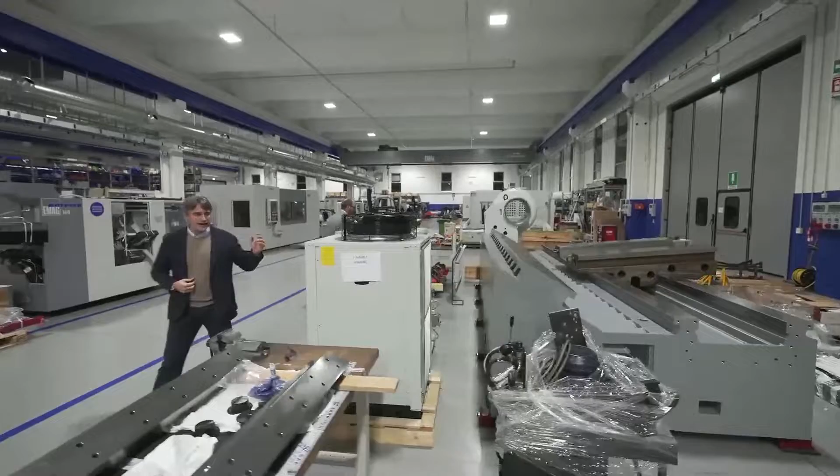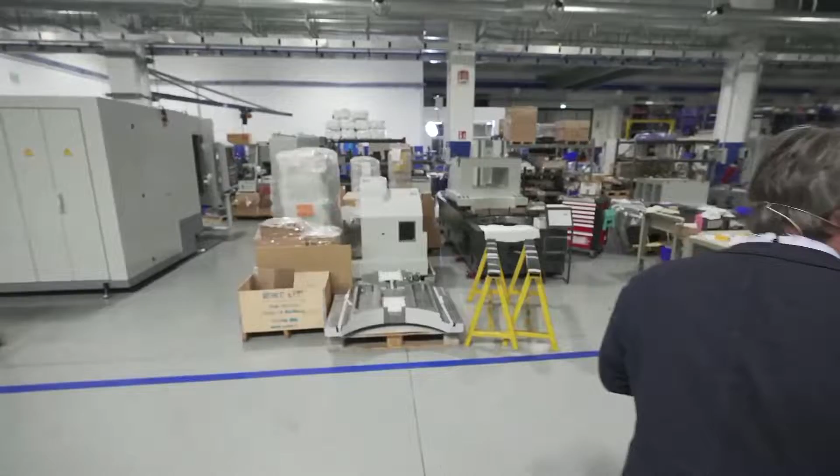So here you see, for example, in construction, a machine which is put in line with the previous big profile grinding machine. This is a rotor milling machine, so it's a very stiff basement with very stiff axis and movements, which will be built and put in line with our profile grinding. For this type of component, we are capable to provide the complete line from milling to the final grinding operation. We also have some shaping machines in assembly, shaping of big size in terms of OD, so we can produce also this type of technology and machine.

And finally, we have here some of our G160 machines that we have previously shown, to go back to one of the topics of our seminar, which is basically the eDrive.

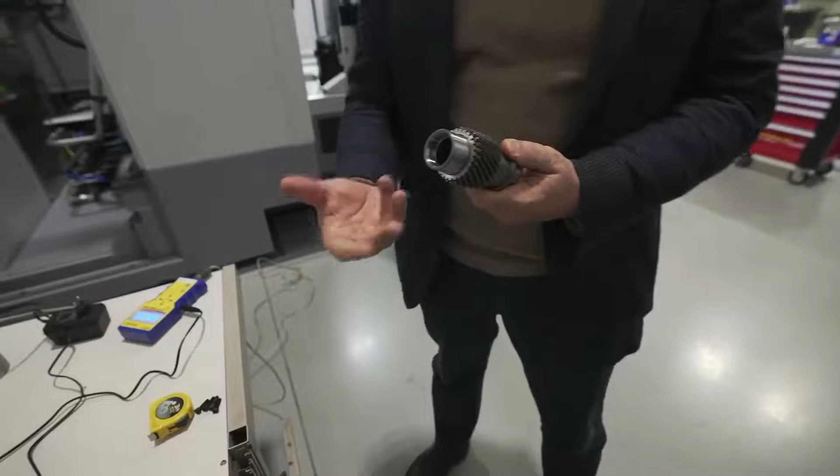This is the input shaft of an electric vehicle transmission reduction. This is the famous part running at a very high speed, which is connected with the spline to the rotor shaft. And this is finally at the end of the machine on which the part will be ground.

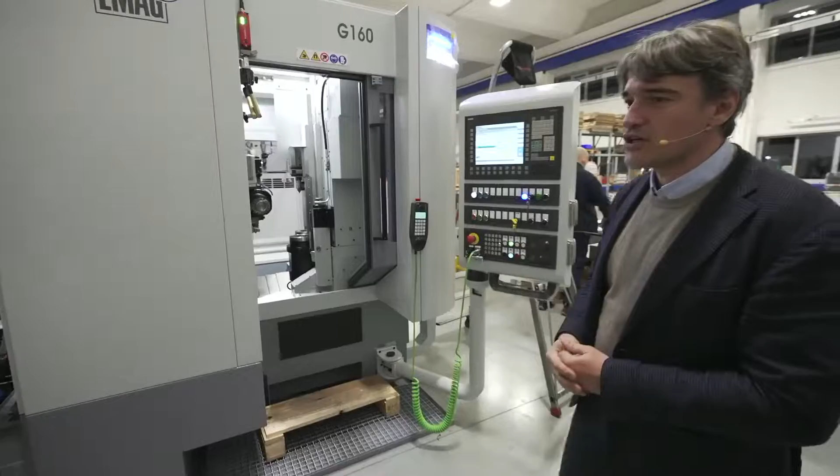This is the G160, where you see the two tables, the two linear axes, the main axis, the main spindle assembled on the vertical shifting axis. This is a project where we will deliver several machines for this type of application.

What you can also see here is that we didn't have any cable in our machine, so it's very easy to clean the machine, and of course we didn't have any wearing cables, because the oil, in comparison with the chips and the dressed material from the grinding wheel, destroys the cable, and we didn't have this here. So short ways and easy to clean these kind of machines.

Very, very accessible in terms of accessibility, ergonomic access to the machine, dresser, fixture, grinding wheel, all very near to each other. So a very usable machine, besides the very high performance, and the fact that it remains the fastest machine in the market for the generating grinding process.

So here we have seen the applications and some of the machines we have in production. Another important topic is that we in EMAG SU basically assemble some machines completely ourselves. Some others are already produced in synergy thanks to the synergy with the EMAG Group, in particular with the production unit of EMAG.

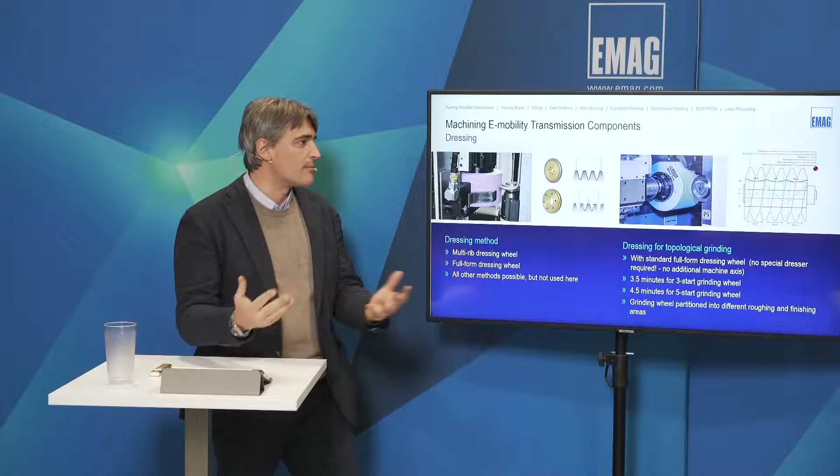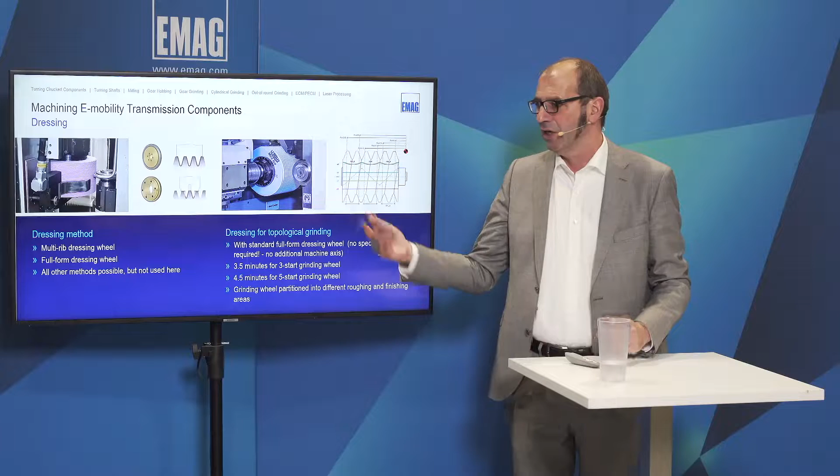Thank you. Next, is the polishing stroke force controlled or path controlled? Well, basically we control the path of all our strokes, if I understand the request properly, otherwise the quality would never reach the proper target. But we do not really control the force in the finishing process. It is not a process that requires a very high force. The only thing is that for this kind of process we must use an accurate process design, which foresees also different behavior of the grinding wheel of a certain grit size in comparison with a grinding wheel of another grit size, or even of another bond, like the super finishing bond that has a resinoid bond instead of a ceramic bond.

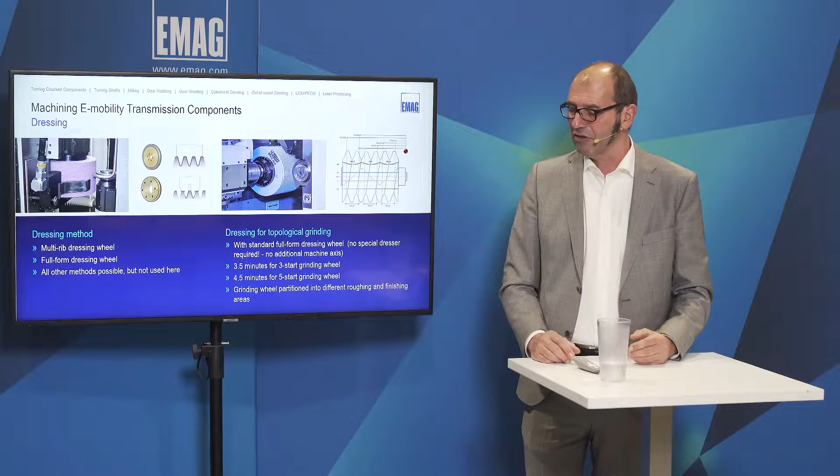What we can do on our grinding machines is handle different batch sizes. So when we have the tooling, we are absolutely free regarding batch sizes. When the tooling is there, we can produce 100 parts or we can produce 100,000 parts; this is not a big difference. The only thing is when we have really low batches, we must do the setup more often. But as you have seen before on the G160, the setup is relatively easy. When we drive the grinding head directly to the door, the operator stays directly next to the grinding wheel and can mount it. The dresser is located here, and when he goes to the load and unload door, the fixtures are directly in front of him. So setting up the machine can be very fast. We also combine this with a quick change adapter for the clamping fixture, so that we can remove these clamping fixtures really in a short time. So here too we have done a lot of development, reducing setup times to compensate for smaller batches.

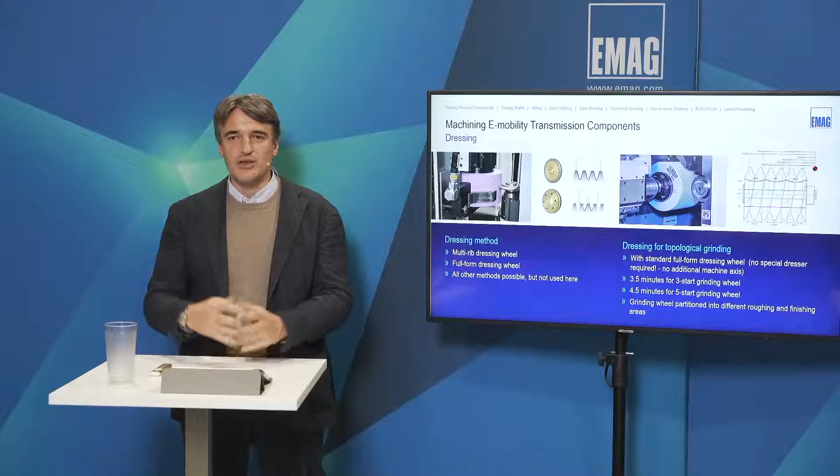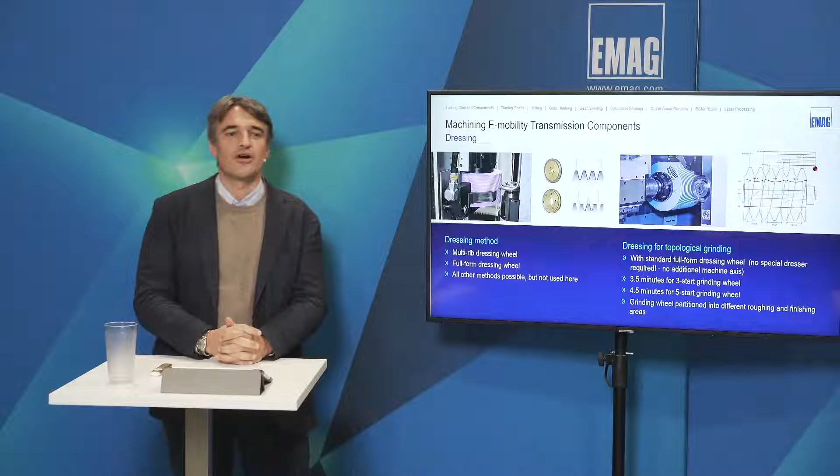Maybe I'll add another point. We have shown you two versions of machines that are basically both equipped with a double table solution: one table in the loading area and another table in the grinding area. These architectures are suitable for high production, we're talking of eDrive for example, high production in automotive from a gear point of view, and therefore the configuration of the machine is very important. If we think about lower batches, we also have configurations of grinding machines with one table, and this is a configuration that can be more convenient for a ramp-up of production, and more convenient as an investment and in changeover time, because it reduces by half the time to equip one table instead of two tables. And also when you must make, in a really short time, a prototype on the G250, for example, it's possible to use profile grinding, so that without any delivery time for special dressing rolls, you can make a part directly. So when you want to have a part now, you can do this. This is not a big issue. So we are absolutely free regarding flexibility, I would say.

Yeah, so no more questions. Ah, perfetto.